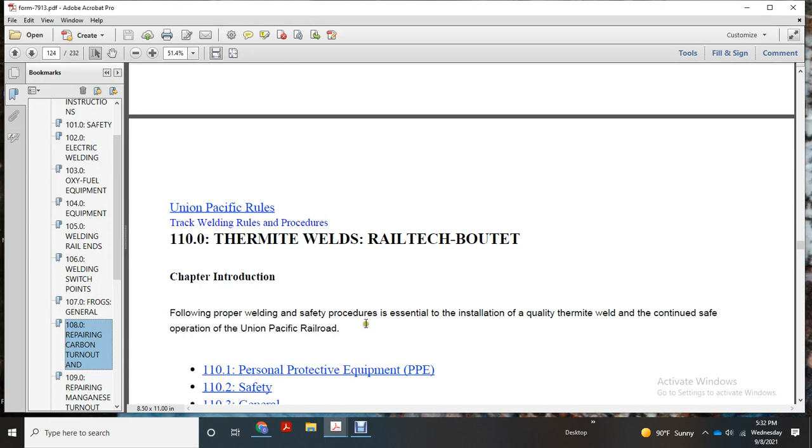Union Pacific Railway Thermite Weld Rail Tech guide, covering the proper welding specifications essential for installation of quality thermite welds and continued safe operation.

Topics include Personal Protective Equipment, general safety, replacement rail, weather restrictions, identifying rail type and alloy standards, determining weld location, compromise welds, compromise transition rail, speed restrictions, alloy rail elimination, bolt holes, reference marks, and removing defects via torch cutting the rail.

Pulling and clearing the rail end gap to the standard one-inch wide gap for the weld, using the alignment slot system to create the crown, with standard wide gap weld realignment and straightening the compromise mold. This includes base plate packing, positioning the flag base, and the preheating procedure with oxy-fuel equipment.

Starting and monitoring the preheat process, the rail tech uses propane and compressed air in the rail preheater, followed by crucible ignition and pouring.

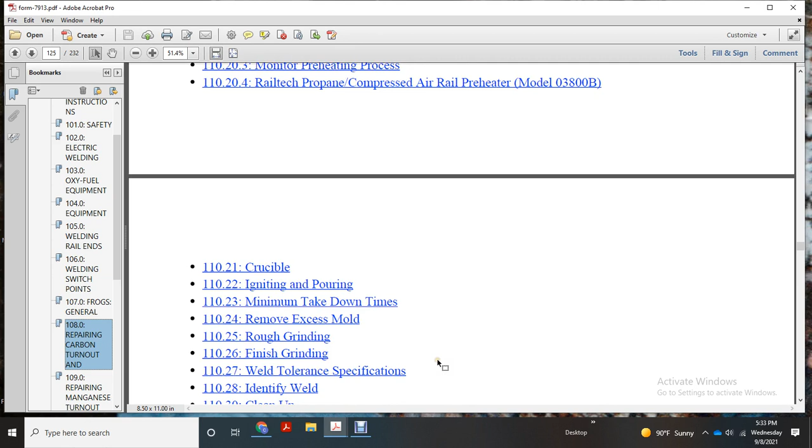Minimum takedown times, removing excess mold material, rough grinding, finishing grinding, welding tolerance specifications, identifying the weld, and cleaning up the thermite weld. Quality audit of the thermite head, washing, filling the weld, repair preparation, recording in the welder's log booklet, dye penetration testing, torch height, molds, clamps, and preheating.

Oxy-fuel torch preheating, forced air propane, torch takedown times, protecting the weld from cooling too quickly, grinding, and the required cleanup of molds and equipment.

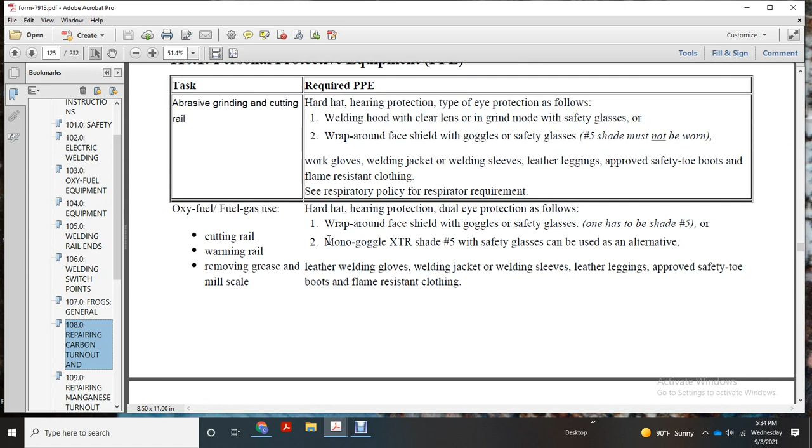Safety note: the presence of moisture in the thermite portion or in the crucible can lead to a rapid buildup and uncontrolled release of steam during the thermite reaction, which may further cause the ejection of molten metal from the crucible.

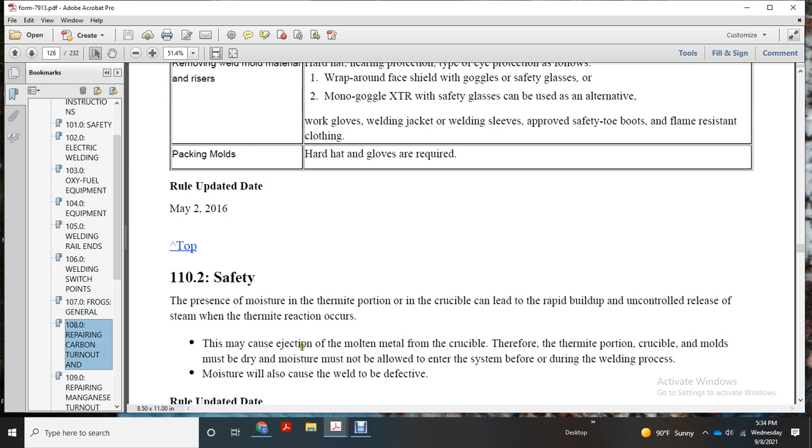Therefore, the thermite portion, crucible and mold must be kept dry, with moisture not allowed to enter the system before or during the welding process. Moisture will also cause the weld to be defective.

All thermite welds have a reference mark indicating the original amount of rail to be trimmed at the mark.

Do not use a wet crucible mold with the thermite oxide charge to make a weld if moisture has entered the crucible mold. If moisture is suspected to be present, discard the damaged item. Before discarding charges or igniters, contact the local Manager Environmental Field Operations for instructions on proper disposal.

It is critical to the success of the weld that there be no shock or vibration to the rail during the solidification process of the molten steel. The recommended shelf life of the weld kits is 3 years.

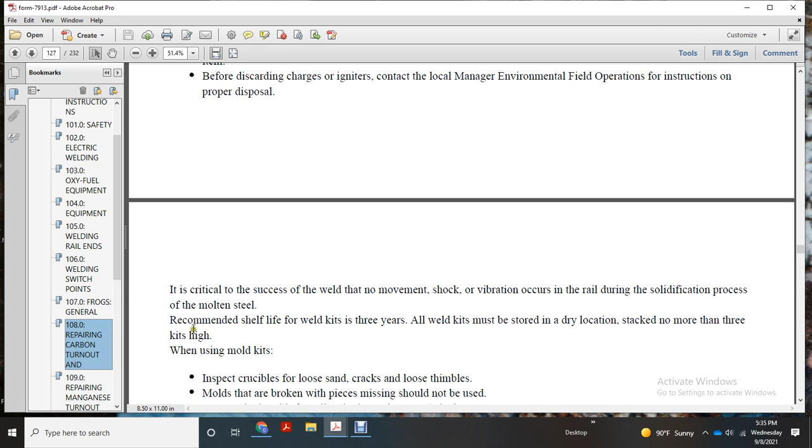Weld kits must be stored in a dry location, stacked no more than 3 kits high. When using the mold kit, inspect the crucible for loose sand and cracked or loose thimbles. Molds that are broken with pieces missing should not be used.

Use a standard mold when the rail end mismatch is up to 1/8 inch. Use the new-to-worn weld rail end mismatch mold for mismatches between 1/8 inch and 1/4 inch.

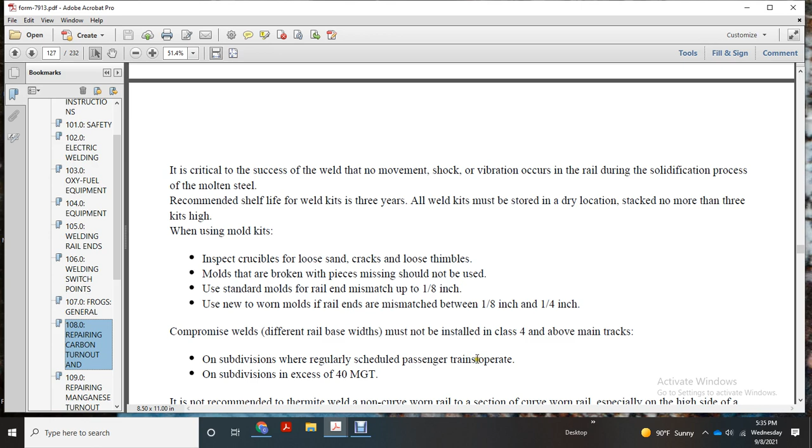Compromise welds for different rail base widths may not be installed on Class 4 or above main track on subdivisions with regularly scheduled passenger trains, or on subdivisions in excess of 40 million gross tons.

Thermite welding is not recommended on non-curved sections of worn rail, especially on the high side. Over the curve, the maximum difference in curve worn rail head width should not exceed 1/8 inch. Gauge side rail head curve measurements should be taken on the top of the rail head, except for mismatches handled by tapered grinding for a smooth transition.

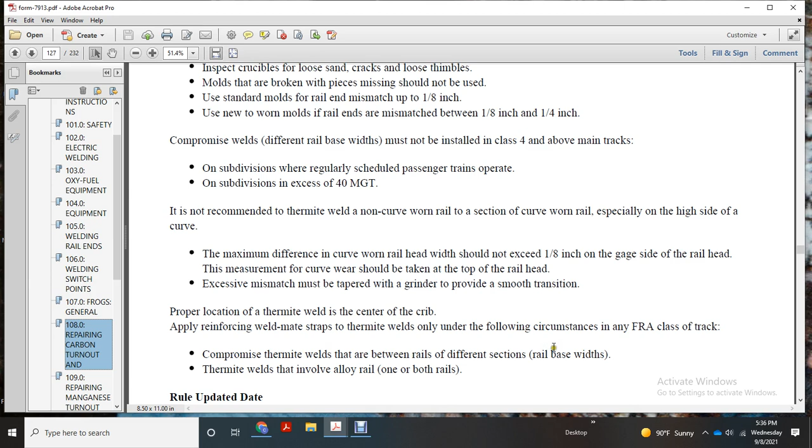Proper location of the thermite weld is at the center of the crib, using weld mate straps with the thermite weld only under specific circumstances. For any FRA class track, compromise thermite welding is used in the area between different rail base sections, where the thermite weld may involve one or both rails.

All replacement rails must have ultrasonic testing performed in accordance with the engineering track maintenance field handbook. Replacement rails for welding must not be less than 15 feet in length, and the vertical difference must not exceed 1/4 inch.

Use a compromising transition rail with a 6-inch base when rail end mismatches exceed 1/4 inch on main track and sidings. Torch-cut rail ends must have at least 2 inches removed using a rail saw, with the rail end ground down. Any mismatched ground portion must be cut out and a replacement rail installed on the main track.

Prior to thermite welding, rail ends must be squared or get proper crown.

Weather restrictions: observe air temperature and weather conditions. Do not make thermite welds on alloy rail when rail temperature is below 32 degrees. Do not make any other welds where rail temperature falls below 5 degrees.

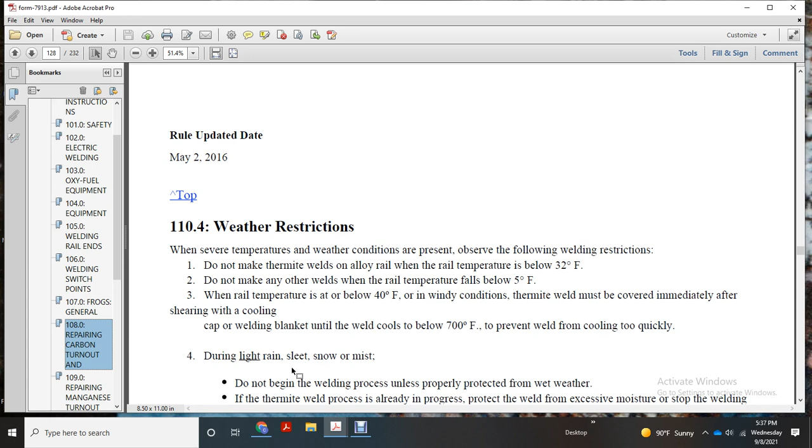When rail temperature is below 40 degrees Fahrenheit and wind conditions are present, the thermite weld must be covered immediately with a cooling end cap or welding blanket until the weld cools below 700 degrees, to prevent the weld from cooling too quickly during light rain, sleet, snow, or mist.

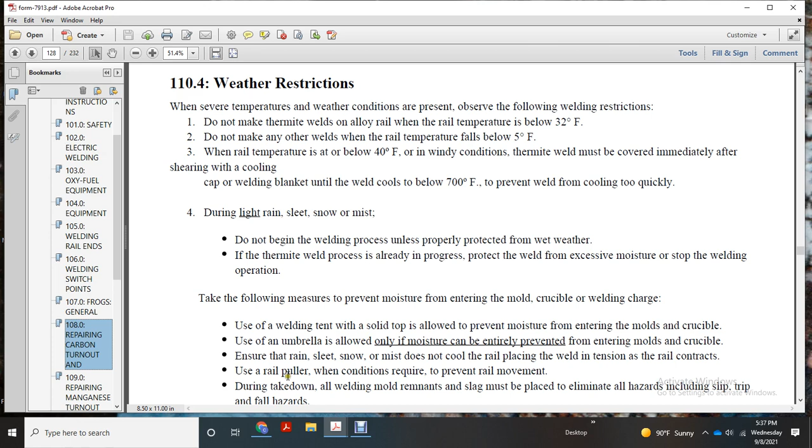During takedown, all welding mold remnants and slag must be placed and eliminated properly to avoid slip, trip, and fall hazards.

Before applying molds, use a rail thermometer or pyrometer to check the rail temperature. If the rail temperature is below 30 degrees Fahrenheit, warm the rails as follows.

Heat 30 to 36 inches at the end of each rail, bringing the rail temperature between 90 and 110 degrees Fahrenheit. If supplemental heat is added, remove any surface condensation.

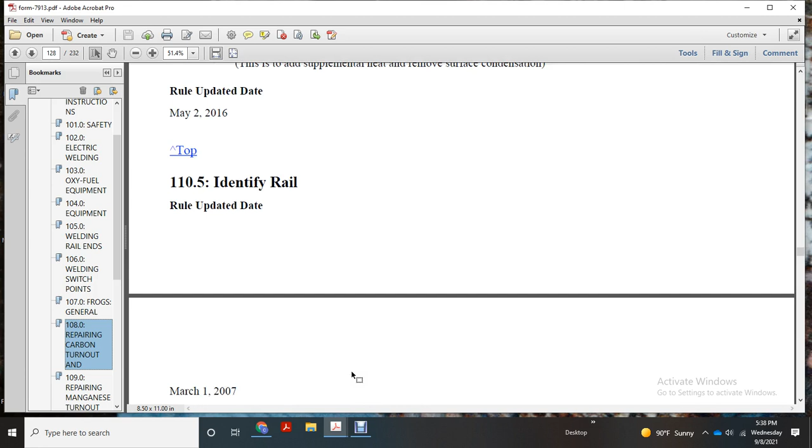Identify the rail type and alloy. Standard rail type must be confirmed, as different rail chemistry determines the specific maintenance and welding requirements.

Determining weld location: do not weld on top of a tie, but ensure that two good ties immediately under each side of the weld provide proper support, as shown in figure 110A.

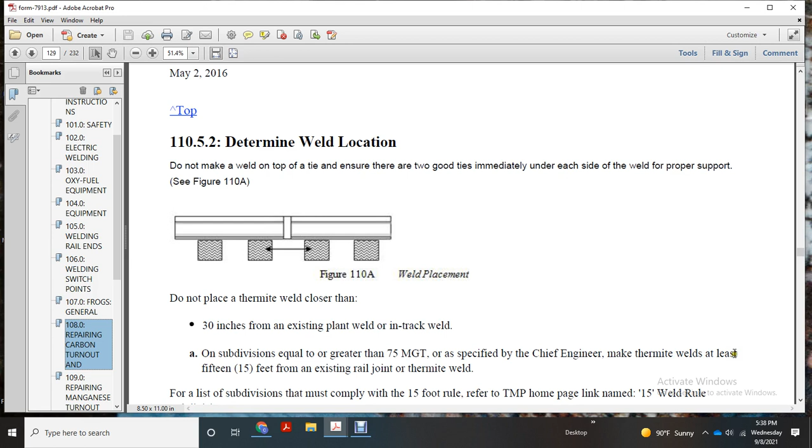Make welds at least 30 inches from an existing weld joint on any subdivision of less than 75 million gross tons not specified by the chief engineer.

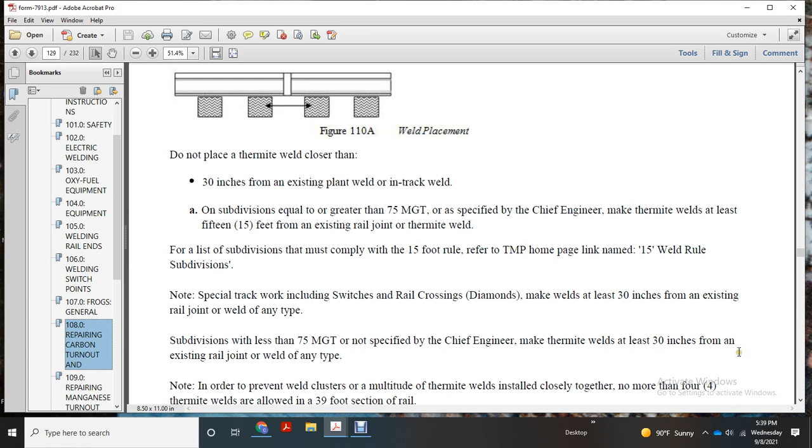Make thermite welds at least 30 inches from an existing rail joint or weld of any type, in order to prevent welding clusters or multiple thermite welds installed too closely together. No more than 4 thermite welds are allowed in a 39-foot section of rail.

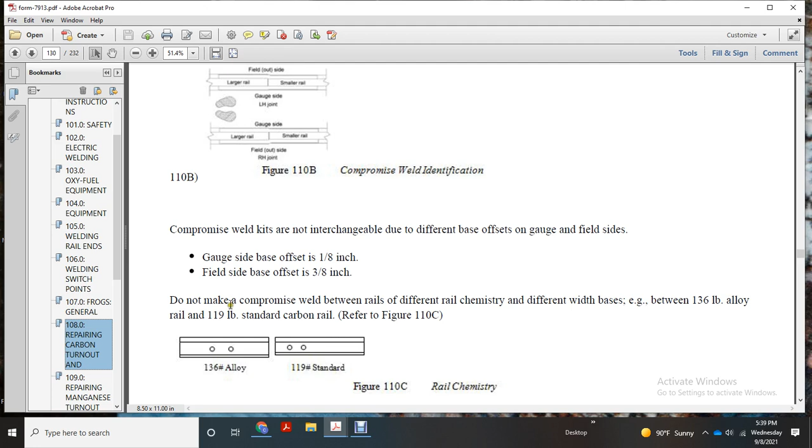If rails with different base widths and different chemistry must be joined, weld standard carbon rail the same way, with a section of alloy rail joined to alloy rail. The rail cut-in must not be less than 15 feet.

Make compromise weld butts between rails with the same chemistry. Compromise welds on opposite rails should be made within the same crib.

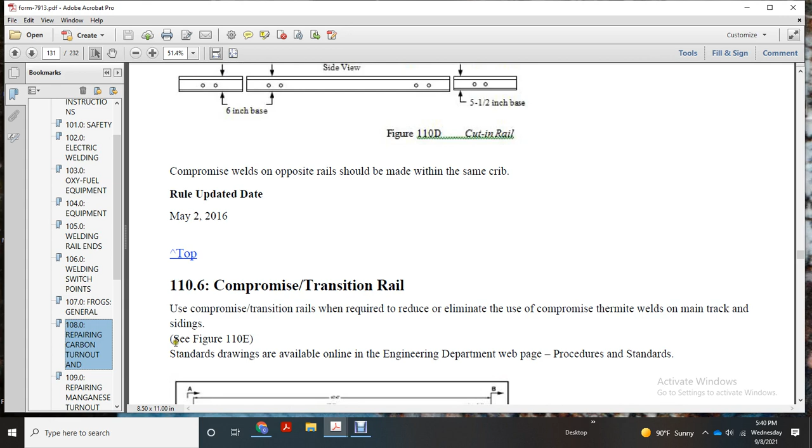Compromise and transition rail: use the compromise transition rail when required to reduce or eliminate compromise thermite welds between main track and siding, as shown in figure 110E. Standard drawings are available on the engineering department web page, procedures, and standards.

Speed restriction for alloy rail at all thermite welds involving alloy rail restrictions: maximum 30 miles per hour for a minimum of 24 hours after installation. Do not remove the speed restriction until all thermite welds in class 3 track and above are inspected and protected with weld mate straps.

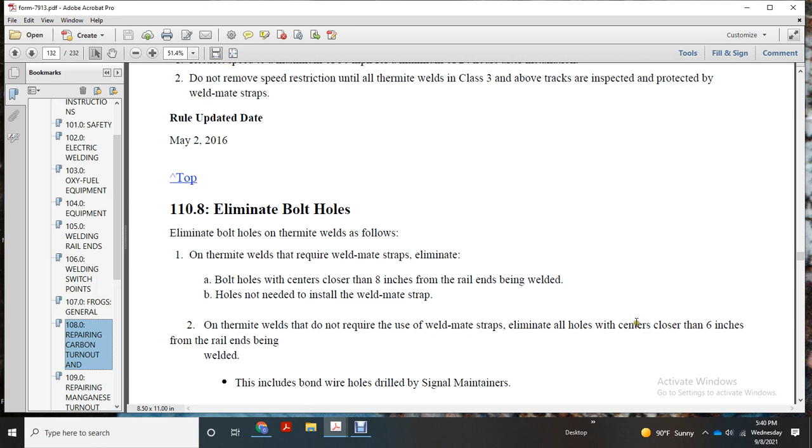Eliminate bolt holes at thermite welds as well. Thermite welds required with a weld mate strap must eliminate bolt holes with the center closer than 8 inches from the rail ends being welded. Holes not needed to install the weld mate strap. On thermite welds that do not require the use of a weld mate strap, eliminate all holes with the center closer than 6 inches from the rail ends being welded. This includes bolt bond wire holes drilled by signal maintainers.

Reference marker: apply reference marker before cutting rail. Remove joints as outlined in the engineering track maintenance field book handbook. See section 7, the track buckling prevention guidelines.

Remove defects: refer to the engineering track maintenance field book, rail defect remediation matrix, section 4, rail and joint replacement. Rail replacement is required with more than one defect, with any kind of defect detected within the same 39-foot length of rail in the same test, except for the bolt hole crack defect identified by rail detector cars.

Find the defect within the weld and do the following in the plant. For an in-track weld, cut out the defect: remove a 1 1/2 inch section of rail, 3/4 inch in each direction from the center of the weld.

For a thermite weld, cut out the defect: remove a 2 3/4 inch section of rail, at least 1 3/8 of an inch in each direction from the center of the weld.

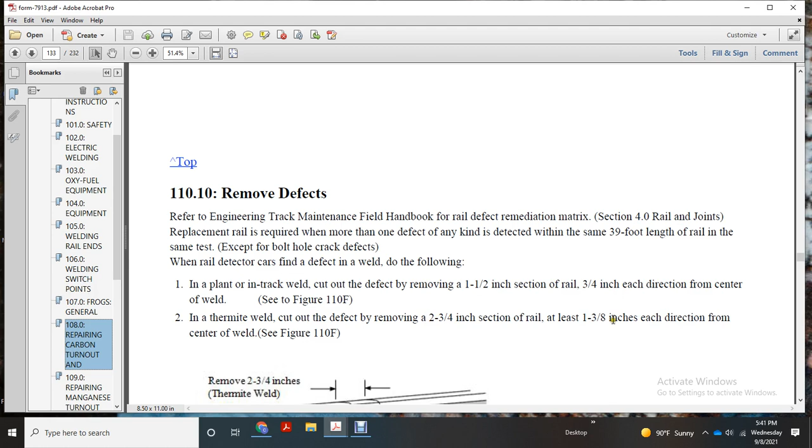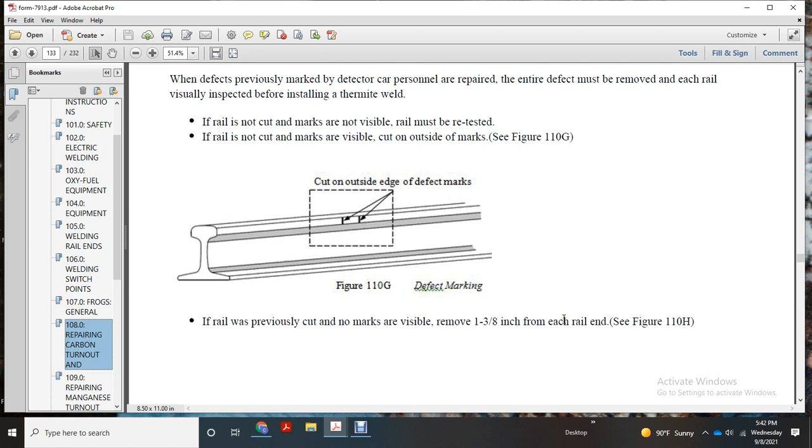When defects are previously marked by the detector, personnel repairing them must remove the entire defect, with each end of the rail visually inspected before installing the thermite weld. If the rail is not cut and the mark is not visible, the rail must be retested. If the rail is not cut and marks are visible, cut on the outside of the marks, showing a cut on the outside edge of the defect. If the rail was previously cut and no marks are visible, remove 1 3/8 inch from each rail end. Make one cut 1 3/8 inch from each end, and make additional cuts as needed.

Torch cut rail: any time the rail is cut with a torch, do the following. Use the rail saw to trim the torch-cut rail end square as soon as possible after the cut is made. After the torch cut is made, eliminate the growth of deep thermal heat cracks; any indication of the torch must be removed. If the rail saw is not available to square the cut, do not use the torch cut as is.

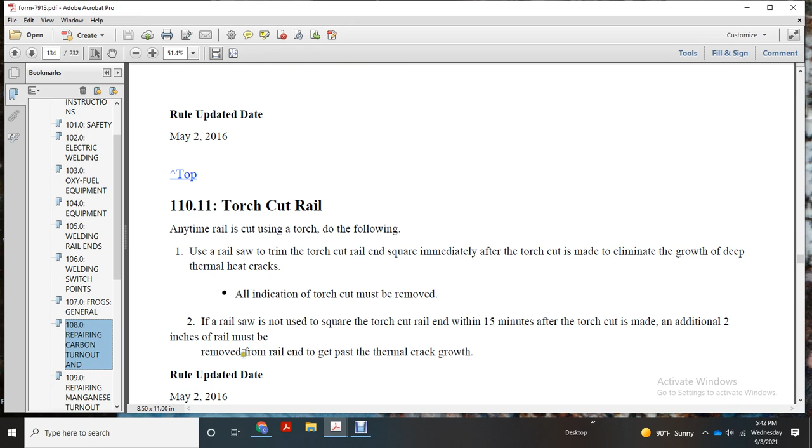Square the torch-cut rail end within 15 minutes after the torch cut is made. An additional 2 inches of rail must be removed from the rail end to get past the thermal crack growth.

Rail puller: refer to chapter 104.1.3, hydraulic rail pullers, for maintenance use requirements. When using the rail puller while installing thermite welds, follow these procedures.

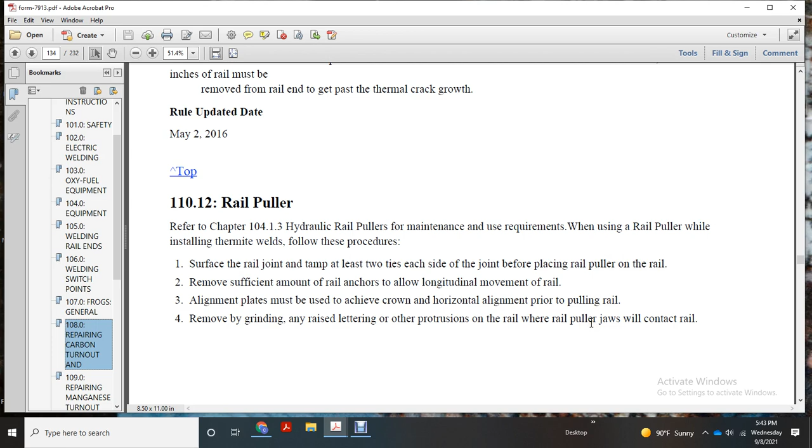Remove by grinding any raised lettering or other protrusions on the rail where the rail puller jaws will contact the rail. Remove dirt and grease from the area using a wire brush or torch, and once clean, inspect the rail puller jaws for any condition that can reduce gripping.

Operate the rail puller to obtain the correct gap. Never remove additional rail anchors while the rail puller is under pressure. If the desired pull cannot be achieved, release the expander, remove additional anchors, and repeat the process.

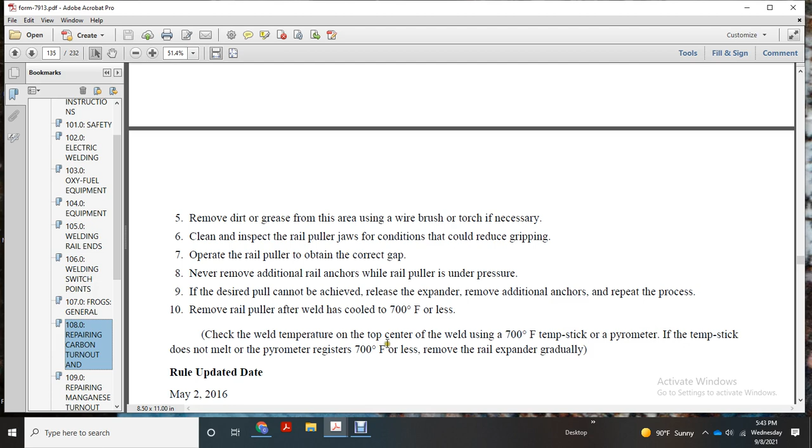Remove the rail puller after the weld has cooled to 700 degrees Fahrenheit or less. Check the welding temperature at the top of the weld using a 700 degree Fahrenheit temp stick or pyrometer. If the temp stick does not melt and the pyrometer registers 700 degrees Fahrenheit or less, remove all rail expanders gradually.

Clean rail ends: remove dirt and other material from the area of the thermite weld. Use the oxy-fuel torch to remove mill scale 3/4 inch from the end of the rail around the entire periphery, and remove grease 4 inches from the end of the rail.

Use a wire brush to remove dirt and other material 4 inches from the end of each rail. Visually inspect the rail ends for defects.

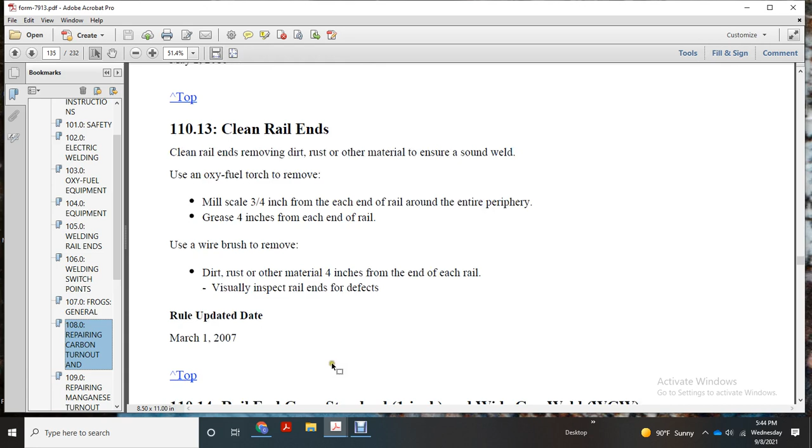Rail end gap: standard is a 1 inch wide gap weld. The required gap must be achieved within 1/16 inch before the thermite weld. Improper gap width results in improper preheating.

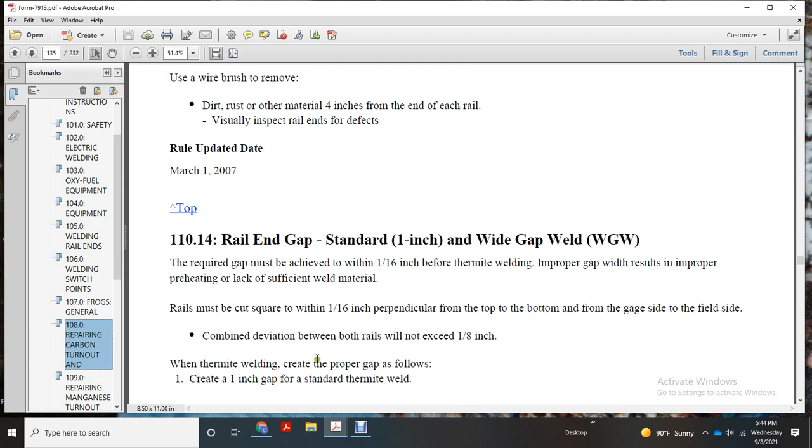Create a proper gap filled with a 1 inch gap for a standard thermite weld, or a 2 3/4 inch gap for a wide gap weld.

Alignment system: use the rail alignment plate as required with the installed thermite weld, with the exception that alignment wedges may only be used where rail alignment plates fail to work properly, such as at switches. Note: steel wedges must be kept in safe condition.

Metal flow is desired to eliminate cracks and chipping. After dressing, the weld is applied with an improved protective covering, creating a crown for the standard and wide gap weld.

To create proper crown, use rail alignment plates as follows: on wooden ties, move the tie plate to accommodate the rail alignment plates, and adz ties for proper fit with alignment plates if necessary. On concrete ties, remove the pads if necessary to accommodate rail alignment plates. Rail fasteners may need to be removed from 2 or 3 ties in each direction of the joint.

Insert rail alignment plates and adjust to achieve the required crown, with proper crown established at the end of the rail, so each rail joint contacts the underside of the straight edge.

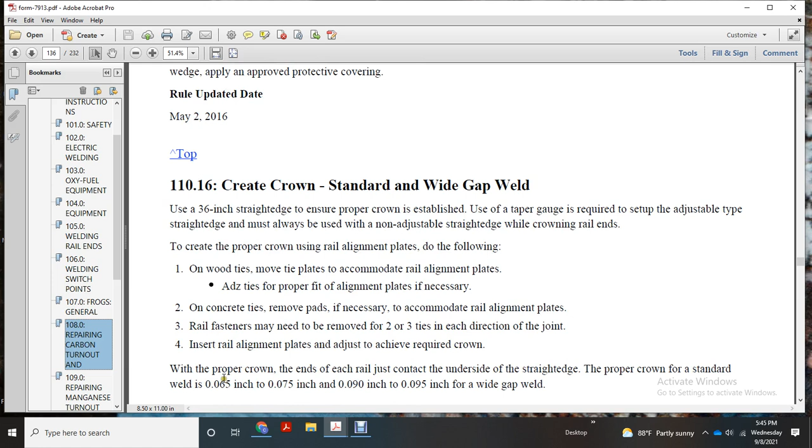Proper crown over the standard weld is 65 thousandths of an inch to 75 thousandths of an inch, or 90 thousandths of an inch to 95 thousandths of an inch for a wide gap weld.

On rail joints where one rail is excessively curved or worn, align with the rail on the field side at the head and base. This creates a compromised joint where rails have a different base width.

Use an alignment plate to achieve proper crown, aligning the rail's base on the gauge side with a 1/8 inch offset, and the base on the field side with a 3/8 inch offset. Align the rails so the gauge side of the head is perfectly aligned.

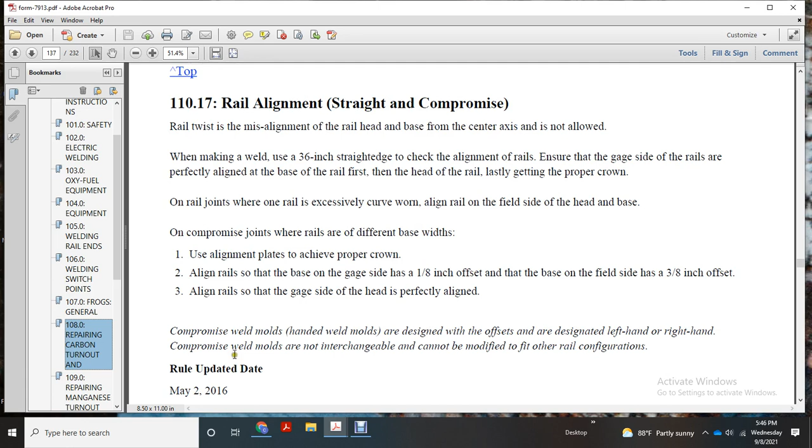Compromise weld molds are handed weld molds. Handed weld molds are designed with the offset of left hand or right hand. Compromised weld molds are not interchangeable and cannot be modified to fit other rail configurations.

Mold and base plate packing: mold and base plate placement is marked on both sides of the rail base for each rail, 2.5 inches on each end of the rail.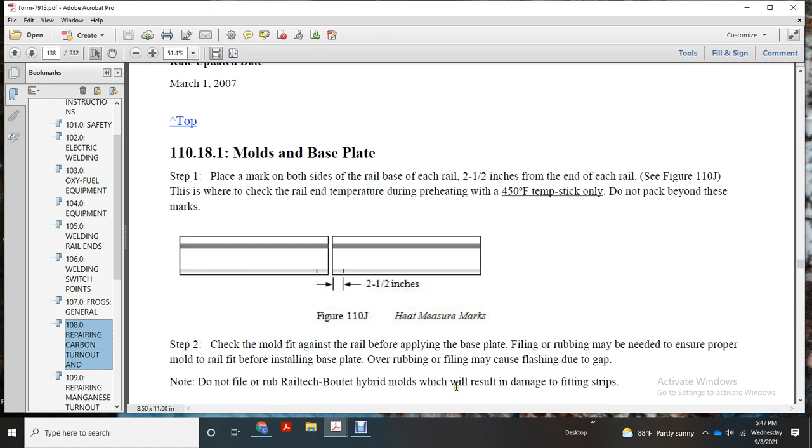Step 3: clean the base plate. Allow the base brick to fit freely. Maintain the base plate in good condition so that it aligns properly at the right angle with the rail.

If the rail base has a mismatch over 1/8 inch, a 1/4 inch stepped base brick must be used. Apply paste only to the edge of the base brick, avoiding leaving excess paste that could be carried into the weld with the molten metal.

Ensure the recess in the base brick is at the exact center of the rail gap. The base plate clamping screws should be snug but not over tightened.

After installation of the base plate, recheck the alignment and crown. Ensure the molds are perfectly centered on the base plate rail gap and fit up against the side of the rails with no gaps visible. Place the molds in the steel jacket, then set the molds onto the rail ends.

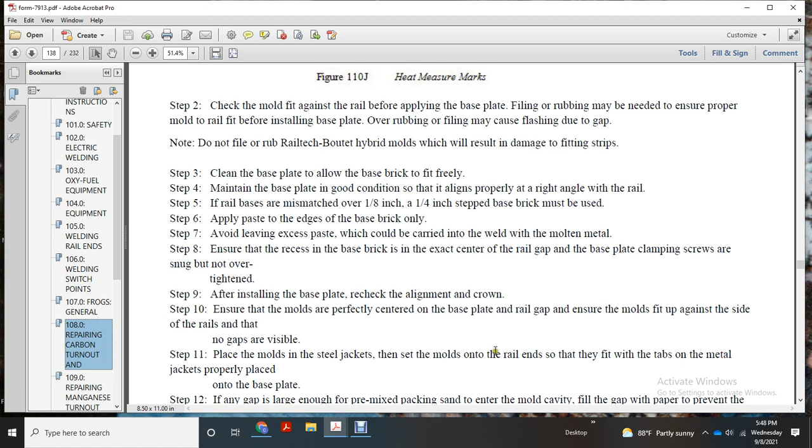Then fit the tabs on the metal jackets properly placed onto the base plate. If any gap is large enough, the premixed packing sand may enter the mold cavity. Fill the gap with paper to prevent the packing sand from entering the cavity.

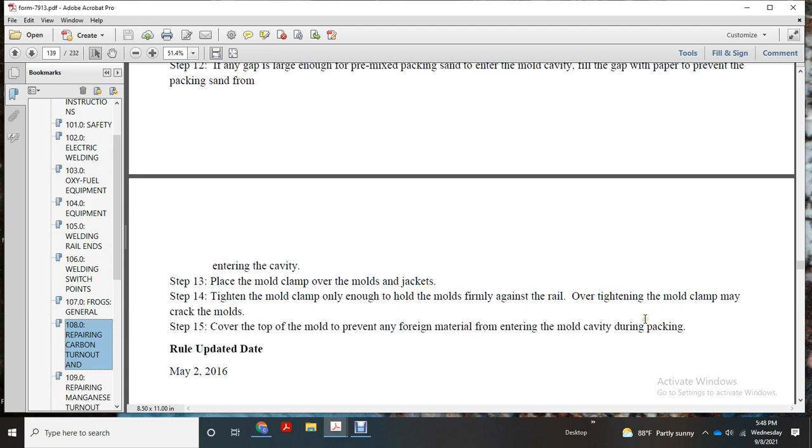Place the mold clamp over the molds and jackets. Tighten the mold clamp only enough to hold the molds firmly against the rail. Over-tightening the mold clamp may crack the molds. Cover the top of the mold to prevent any foreign material from entering the mold cavity during packing.

Packing: pack the mold solid with the premixed packing sand. Tightly seal all the seams and joints and maintain minimum thickness for the packing sand. Ensure that all the voids are filled.

Apply a second layer of packing sand, pressing firmly into place with your fingertips and palm. Do not pound against the premixed packing sand, as this pounding may jar the rail, causing it to misalign. Ensure the packing sand does not enter the mold cavity.

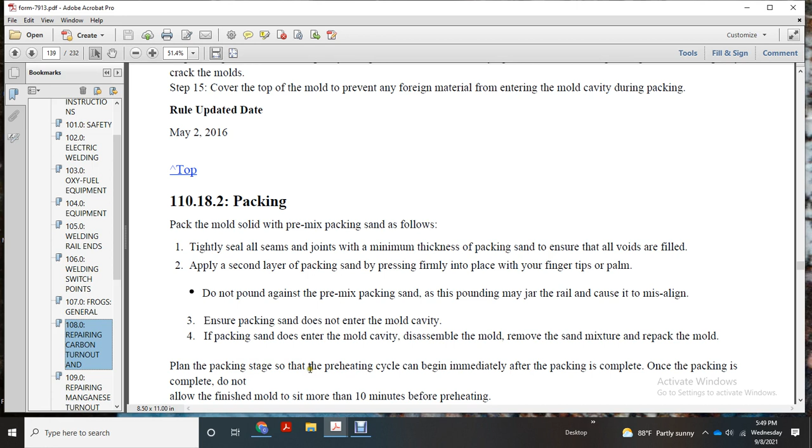If the packing sand does enter the mold cavity, disassemble the mold, remove the sand mixture, and repack the mold. Plan the packing stage so that the preheating cycle can begin, and begin preheating immediately after packaging is complete. Once packaging is complete, do not allow the finished mold to sit more than 10 minutes before preheating.

Position slag basins to allow the slag to flow out with the risers properly. On the turn track, position the slag basin inside of the rail on the gauge side; on the uncurved track, position the slag basin on the low side of the rail.

Preheating procedure: before preheating, ensure that you are familiar with and have been properly trained on the operation of the equipment. An approved torch stand must be used for preheating of thermite welds. The torch must be level, and torch height checked prior to preheating.

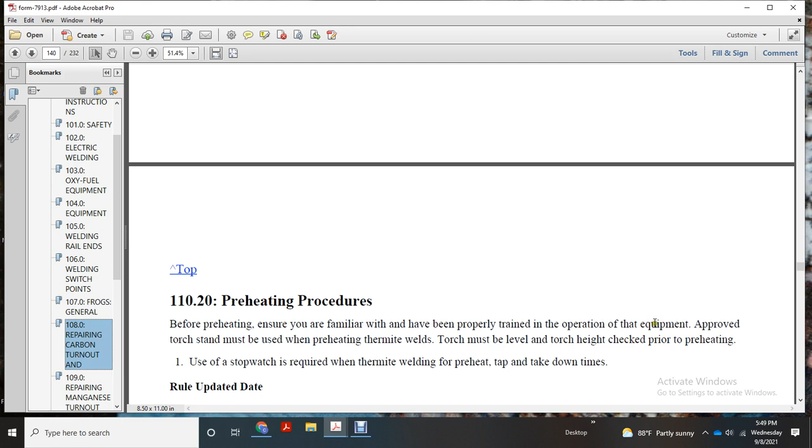Use a stopwatch, required with thermite welding, for preheat, tap and take down times. Use Oxy-Propane equipment: the Victor HD310C torch body or equivalent with the Railtech flat head or Victor TWN-5 rectangular torch tip. Pressure settings may vary with each.

The equipment should be adjusted accordingly with the torch mounted in-line; gauges must be verified. Pressure settings for every weld should be placed between the torch handle and the flashback arrestor. Extreme pressure variances of more than 15 psi between the cylinder regulator and in-line gauges indicate problems that must be corrected. Ensure sufficient oxygen and fuel gas in the cylinder to complete preheating.

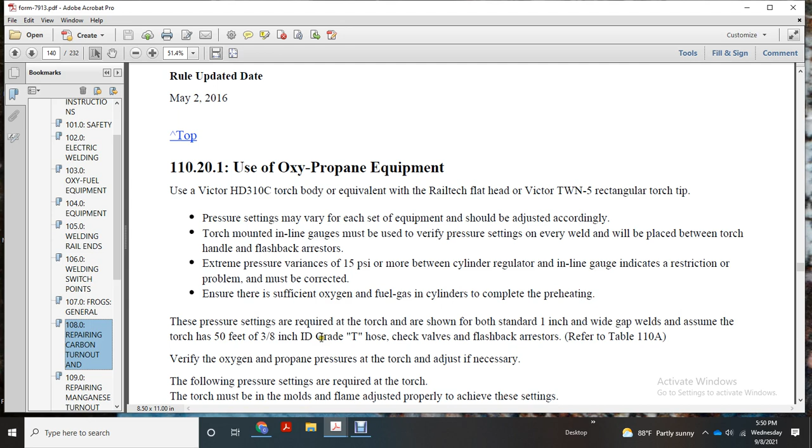Pressure setting required for the torch is shown for both the standard 1-inch and wide gap welds. Assume the torch hose is 50 feet with a 3/8 inch inside diameter, Grade T hose, check valve with a flashback arrestor, per table 110A.

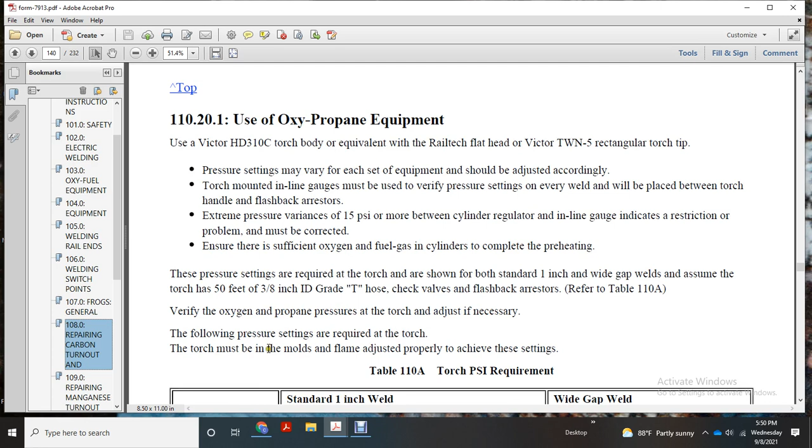Verify oxygen and propane pressure for the torch. Adjust as necessary following the required pressure settings. The torch must be mounted with the flame adjusted properly per the settings.

Torch PSI requirement: Propane 15 PSI for standard 1 inch weld, 15 PSI for wide gap weld. Oxygen 60 PSI for standard 1 inch weld, 60 PSI for wide gap weld. Do not use hose length greater than 100 feet.

Position the torch 1.5 inches above the top of the rail for the standard 1-inch weld. Operate at 2 3/8 inches above the top of the rail for a wide gap weld. Ignite the Oxy-Propane torch while it is mounted on the torch stand.

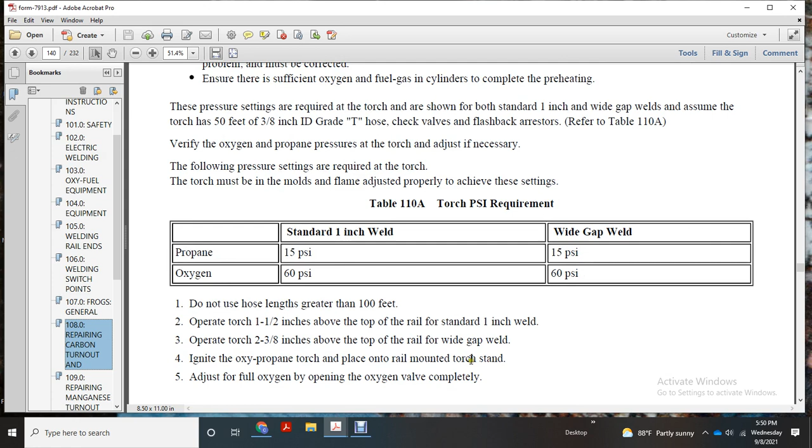Open the oxygen valve completely. Open the propane valve until a crackling sound occurs, then slowly close the propane valve until the crackling sound disappears.

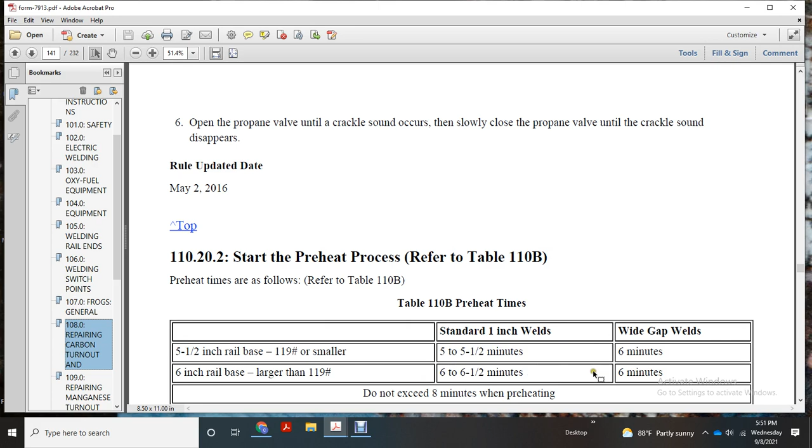Start of the preheat process, per table 110B: for rail base 5.5 inches (number 119 or smaller), standard inch weld 5 to 5.5 minutes, wide gap weld 6 minutes. For rail base 6 inches (larger than number 119), standard inch weld 6 to 6.5 minutes, wide gap weld 6 minutes. Do not exceed 8 minutes when preheating.

Monitoring the preheating process: wear the required protective equipment when monitoring. Ensure the torch is centered and straight with the rail. The igniting operator for the torch must observe the entire preheating of the rail end.

Ensure the rail ends do not melt. Ensure the rail ends and molds heat evenly to prevent improper fusion and internal cracking as a result of uneven cooling. Ensure the web glows bright red-orange with no sign of sweating or melting.

If the rail end is getting too hot, cool the flame by increasing the propane on the torch handle.

Ensure the rail head and base glow dull red with no black areas. After removing the torch, observe the true color of the rail ends.

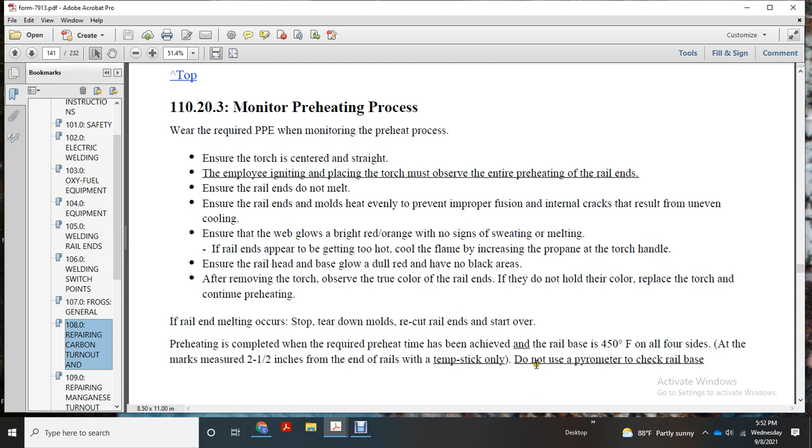If they do not hold the correct color, replace the torch and continue preheating. If rail end melting occurs, stop, tear down the molds, recut the rail ends, and start over. Preheating is complete when the required preheat time is achieved and the rail base reaches 450 degrees on all four sides, measured at 2.5 inches from the end of the rail with a temp stick only. Do not use the pyrometer to check rail base.

Railtech Propane Compressed Air Rail Preheater, Model 03800B. Setup for the operator of the propane compressed air rail preheater.

Aligning the inox heating nozzle, the flat piece of the nozzle should be no higher than the top of the inside of the mold where the diverter plug fits. The nozzle tip must be aligned straight up and down, perpendicular over the rail.

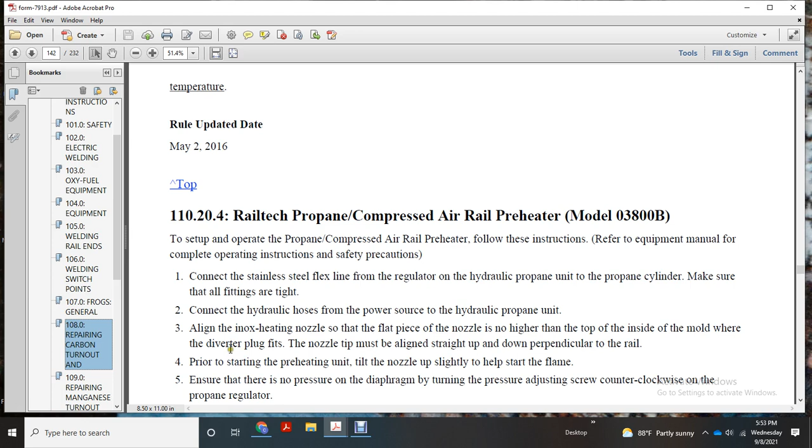For proper starting of the preheating, tilt the nozzle slightly to help start the flame. Ensure there is no pressure on the diaphragm. Turn the pressure adjusting screw counterclockwise on the propane regulator.

Open the hydraulic system to 10 gallons per minute at 2000 psi. Open the hydraulic control valve of the preheater to engage the blower unit. Open the valve of the propane cylinder completely. Open the air bypass valve located on the inox burner and adjust the air pressure for ease of lighting. Turn the pressure adjusting screw clockwise on the propane regulator to supply 8 to 10 psi.

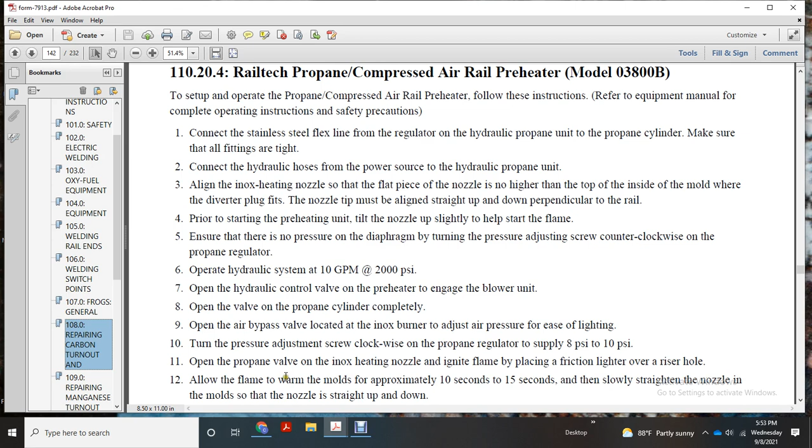Open the propane valve on the inox heating nozzle. Ignite the flame by placing a friction lighter over the riser. Hold the flame to warm the molds for approximately 10 to 15 seconds. Then slowly straighten the nozzle in the mold so it is straight up and down. The flame should be in the rail area and the riser.

If the flames are in the riser only, again, tilt the nozzle and then slowly straighten it as needed to adjust the flame, using the propane on and off valve located on the inox burner. After adjusting the nozzle, achieve the desired flame.

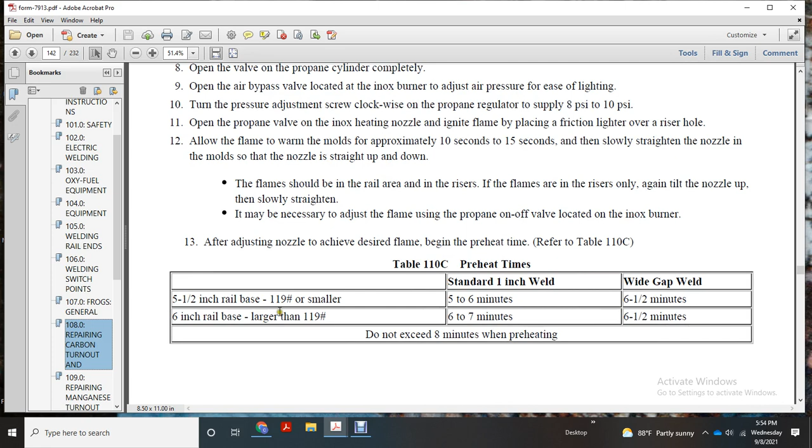Begin the preheat per Table 110C. For a 5.5-inch rail base, number 119 or smaller, preheat 5 to 6 minutes, or 6.5 minutes for wide gap. For a 6-inch rail base, larger than that, preheat 6 to 7 minutes, or 6.5 minutes for wide gap. Do not exceed 8 minutes when preheating.

Preheating is complete when the required preheat time has been achieved and the rail base reaches 450 degrees on all four sides, measured at 2.5 inches from the end of the rail base with a temp stick. Do not use the pyrometer to check the rail base temperature.

Crucible: while preheating the molds and rail ends, inspect the crucible for loose sand and cracks. Do not use the crucible if cracks are present or if it has a loose thimble. Do not place the crucible directly on any surface that might allow foreign material to stick to the bottom.

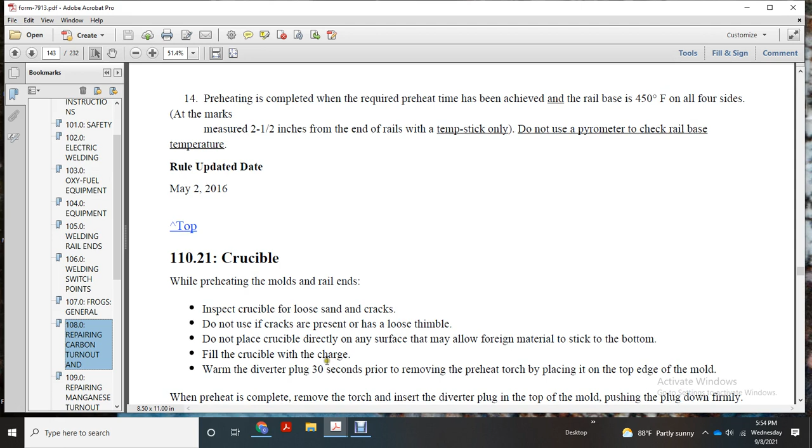Fill the crucible with the charge. Warm the diverter plug 30 seconds prior to removing the preheat torch. Place it on the top edge of the mold. When preheat is complete, remove the torch and insert the diverter plug in the top of the mold, pushing the plug down firmly.

Do not pound the plug into place. Note that the diverter plug always directs the molten steel, allowing it to flow into the mold properly and fill the mold evenly. Place the crucible onto the mold, centered over the diverter plug, using the two large riser holes as guides.

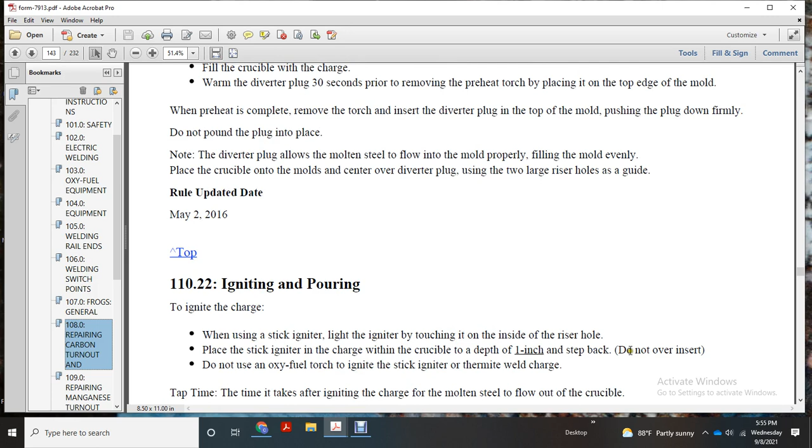Ignition and pouring: to ignite the charge, when using the stick igniter, light the igniter by touching the inside of the riser hole. Place the stick igniter into the charge within the crucible to a depth of 1 inch. Step back, do not over-insert. Do not use the oxy-fuel torch to ignite the stick igniter or thermite weld charge.

Tap time is the time it takes after igniting the charge for the molten steel to flow out of the crucible. Acceptable tap time is 15 to 35 seconds. If the tap time is less than 15 seconds or more than 35 seconds, the weld must be considered defective and removed from the track.

Hot metal or slag coming into contact with moisture can cause an explosion. When the thermite weld is pouring, protect yourself and others from coming into contact with hot molten steel, as high as 5,000 degrees. The bright light from the thermite reaction can harm your eyes, so protect them.

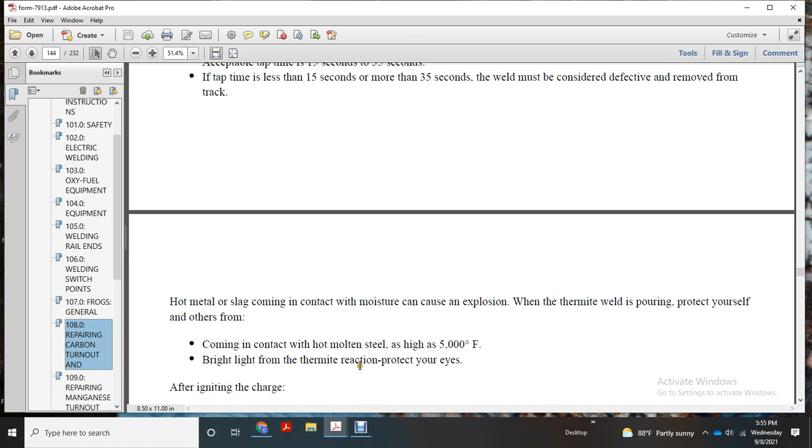After ignition of the charge, stand back 15 feet while the molten steel pours into the mold. If a leak develops in the mold, do not attempt to stop the leak.

Minimum takedown times: remove the crucible using the CJ fork, place it in a safe dry location. Remove the slag basin and place it in a safe dry location. Wait 20 minutes before emptying the slag basin and remove the mold clamp and jackets, then demold the weld material.

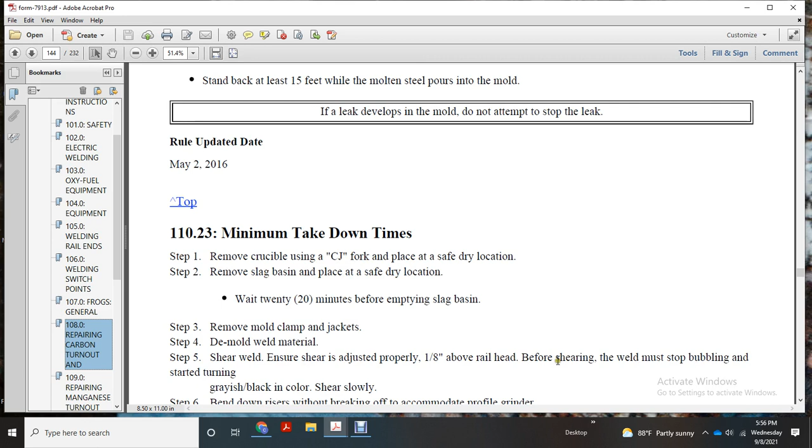Shear weld. Ensure the shear is adjusted properly 1/8 of an inch above the railhead. Before shearing, the weld must have stopped bubbling and started turning a grayish black color. Shear slowly, bending down risers without breaking off, accommodate with a profile grinder.

When the slag stops pouring into the slag basin, start the minimum takedown times as follows: remove the crucible in 5 minutes, remove the slag basin in 5 minutes, remove the clamp and jackets in 5 minutes for 1 inch.

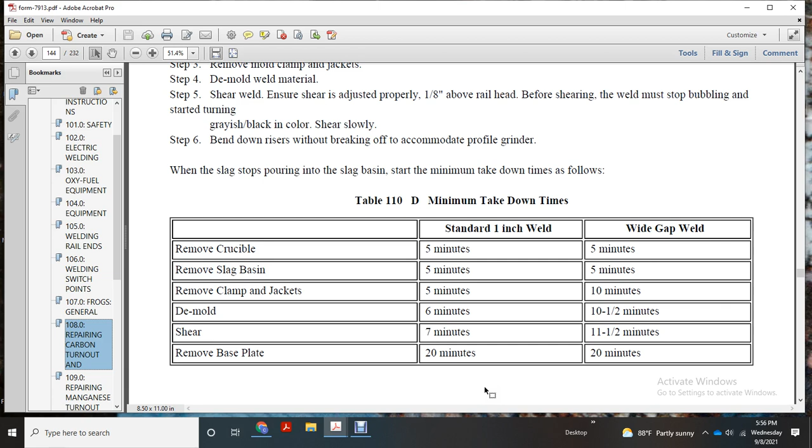Do not discard hot slag where someone could step on it or where it could start a grass fire. Do not discard hot slag on wet soil, snow, or throw it into water.

Rough grinding on the railhead portion of the thermite weld can be performed after shearing. Rough grinding of the running surface of the rail shall be performed with a surface grinder, completed when the excess weld material is reduced to approximately 30 thousandths of an inch.

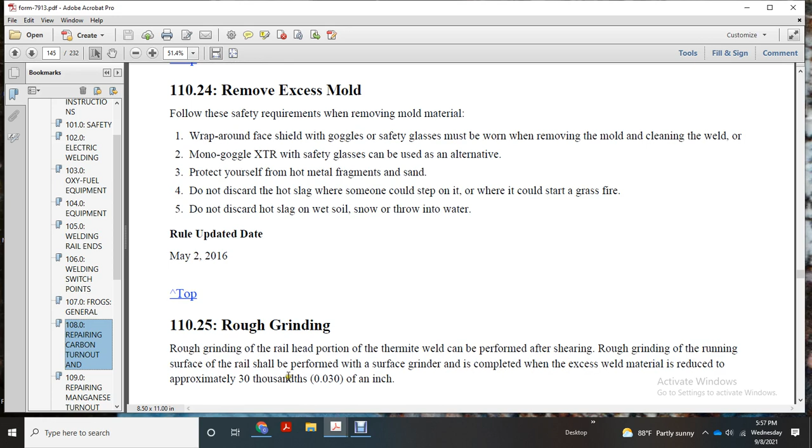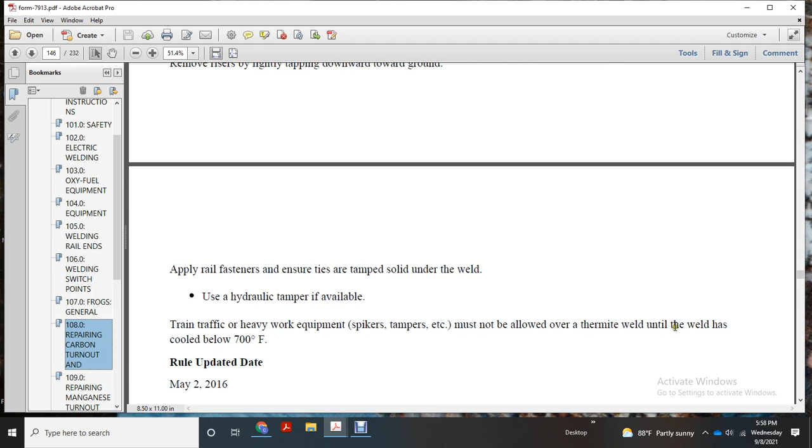Train traffic, heavy work equipment, spikers and tampers must not be allowed over the thermite weld until the weld has cooled below 700 degrees Fahrenheit.

The finishing grinding using an 8x1 straight stone grinder taper to remove the sharp edge of the teardrop under the railhead. Grind the risers flush with the weld collar. Do not grind into the collar. Don't grind into the parent metal.

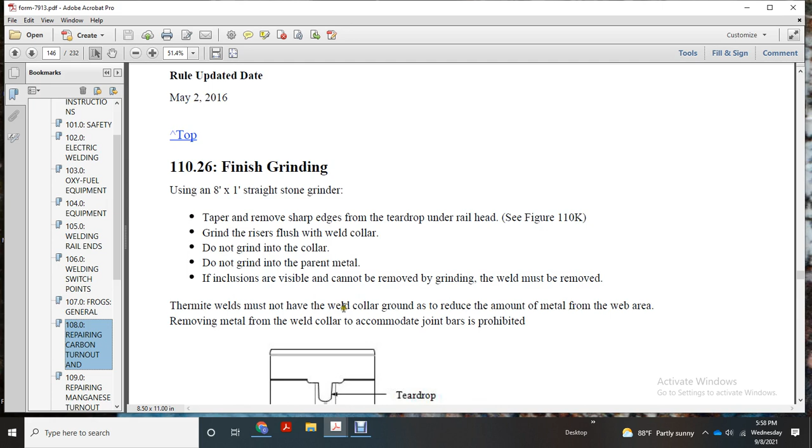Inclusions that are visible that cannot be removed by grinding must be removed. The thermite weld must not have the welded collar ground to reduce the amount of metal from the web area. Removing metal from the welded collar to accommodate joint bars is prohibited. Shape the teardrop of the collar on the underside of the railhead.

For vertical offset or gauge mismatch, grind the rail to achieve a gradual transition. Final surface grinding will be performed after the weld has cooled to below 700 degrees.

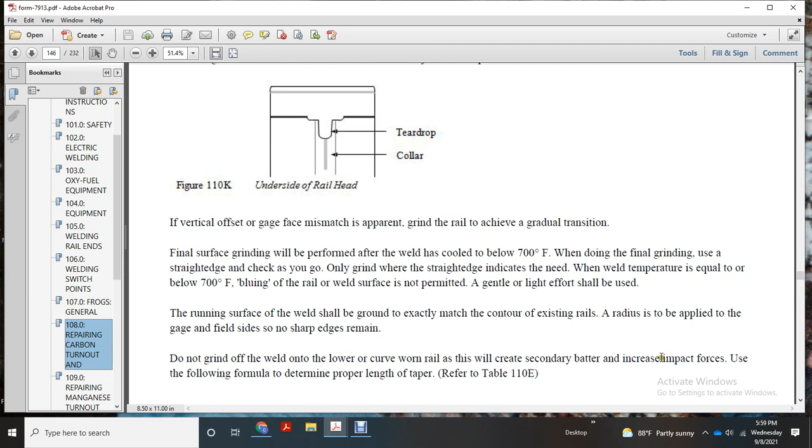Use the following formula to determine the proper length of the taper for table 110E: minimum ramp length in feet equals the offset in thousandths of an inch over 8,000ths of an inch.

30 thousandths of an inch: 4-inch taper length. 60 thousandths of an inch: 8-inch taper length. 90 thousandths of an inch: 12-inch taper length. 125 thousandths of an inch: 16-inch taper length.

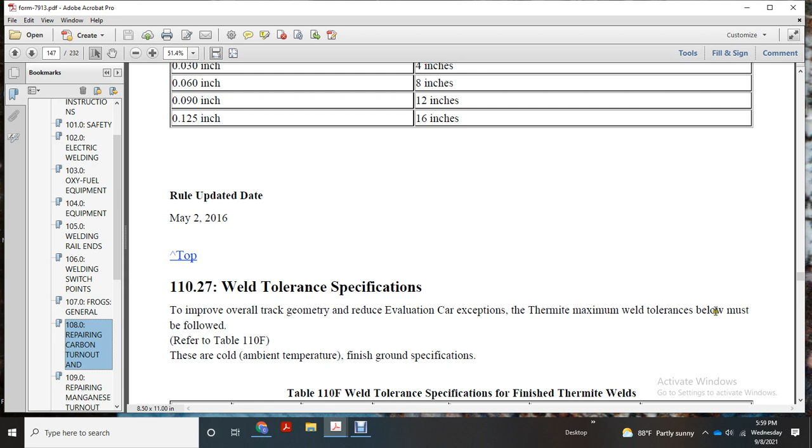Welded tolerance and specification improve the overall track geometry and reduce evaluation car exceptions. The thermite maximum welded tolerance below must be followed with reference to table 110F, after they reach cold ambient temperature, for the finish ground specification of the finished thermite weld.

Thermite vertical crown, vertical offset, horizontal kink, base offset, horizontal offset, base vertical offset. Maximum base vertical offset will not exceed 250, and the vertical crown with the thermite is 40 thousandths inch. Vertical offset 20 thousandths inch, horizontal offset 40 thousandths inch, horizontal kink 25 thousandths inch, base horizontal offset 60 thousandths inch, base vertical offset 250 thousandths inch.

Combined vertical crown offset with a 60 thousandths inch maximum, express tangential deviation 18 inches from the center of the weld. Combined horizontal kink offset with a 60 thousandths inch maximum, express tangential deviation 18 inches from the center of the weld. Measured on the convex side of the railhead. After the thermite weld has been installed use a straight edge to measure the crown vertical offset, horizontal offset,

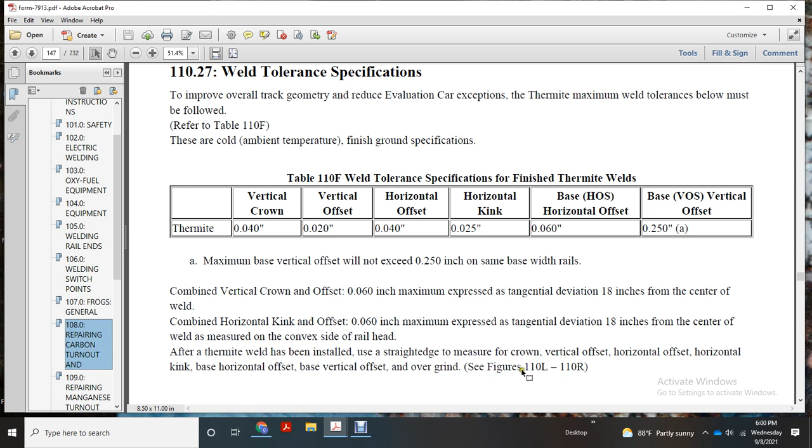Horizontal kink, base horizontal offset, base vertical offset, and the over grinding figures 110L to 110R.

Welds must not be over ground. Use straight edge periodically to check the process.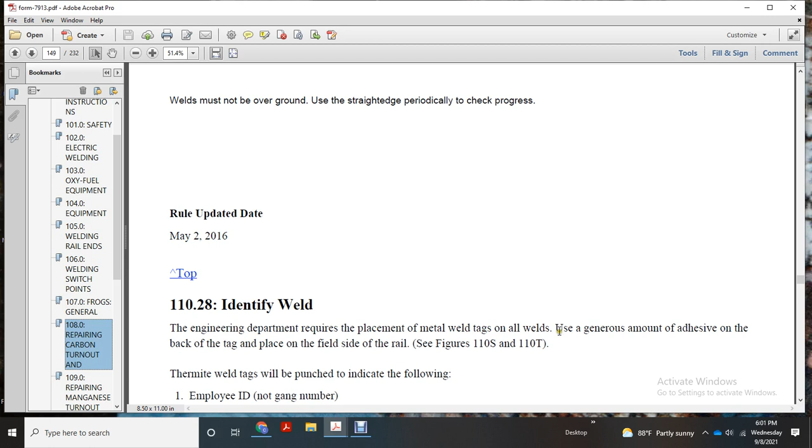Alright, identify the weld. Identify the weld. Engineering department required the placement of the metal welded tags on all welds. Generous amount of the adhesive on the back of the tag place on the field side of the rail. See figure

110S and 110T. The thermite weld tags will be punched indicating the following: employee ID, not the gang number. Month and year install, month and year weld kit manufactured, 1-inch gap weld gap, or weld gap weld.

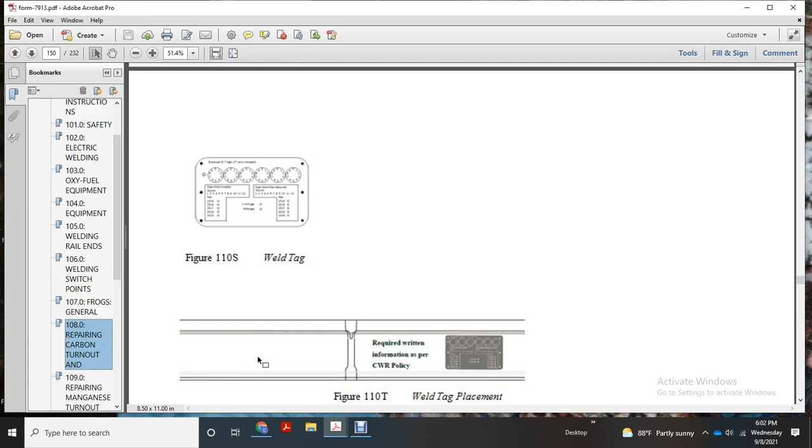Show the weld tag, and it's required written information. Continuous welded rail policy. Cleanup.

The cleanup will be performed before final grinding. Cleanup includes reapplying rail fasteners, reapplying the anchors, filling the cribs, removing any welded material waste, including slag, spent molds, riser, packaging from the worksite. Dispose of them properly. Do not leave welded waste exposed at the worksite.

Approved welding bucket can be used to remove the debris. Worksite store stock item 460-7115.

Thermite weld quality audit. Managers and employees use the written thermite weld quality audit form to assess the workmanship of the welding gang in the field. Welding audits to be submitted to the electronic weld quality auditing system in the TMP.

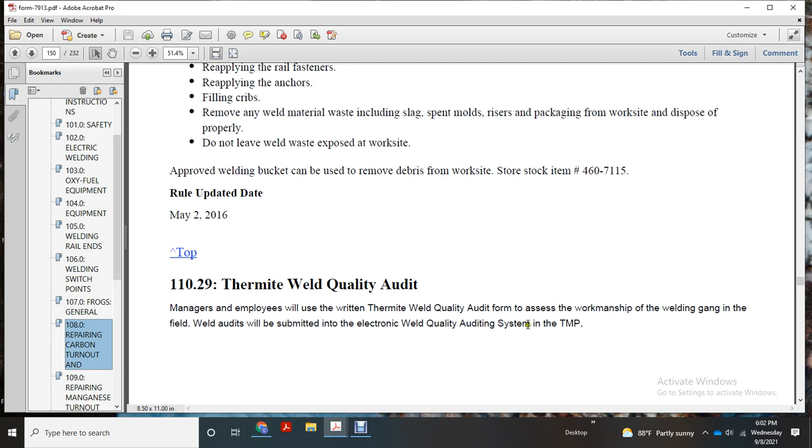Alright, thermite head wash weld. Only designated track welding employees who have the training and are qualified are allowed to install thermite head wash weld with all personal protective equipment. Must be aware of any thermite welding procedure when performing dye penetrant tests.

Wear wrap-around face shield with goggles and safety goggles, model XTR with safety glass can be used as an alternative. Railtech bucket kits available in number 115 and 132, 136 rail.

Rail preparation. Do not weld a non-alloy rail with a rail temperature below 5 degrees Fahrenheit. Warm rail, remove any traces of moisture around the entire peripheral rail.

Use Oxy Fuel torch and wire brush to clean the rail of any dirt, oil, grease, or other contaminants on the rail. Align with the tool, pre-crown rail with 0.045 inch with a 36 inch straight edge

Taper gauge before grinding into the 2-inch slot. Mark the rail with the depth of the grinding on both sides of the rail head.

Use the depth tool. Remove by grinding the entire defect in the rail head, leaving 1/4 inch of the rail head. The ground strip must be left even on both sides of the railhead.

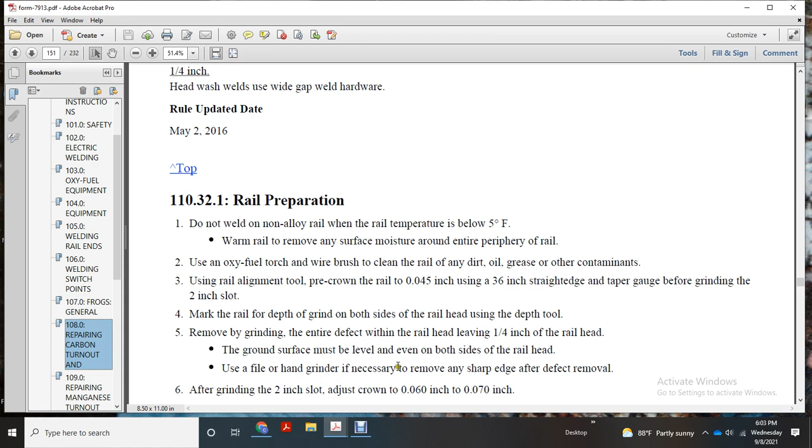Use file or hand grinder, if necessary, to remove any sharp edge from the defect removal. After grinding the 2-inch slot, adjust crown to 0.060 to 0.070 of an inch.

Welder's log booklet. All thermite welds installed must be recorded. Welder's log booklet with all required information, including placing the welding charge sticker in the specified area on the log page, and the sticker cannot be placed into the book.

The sticker information must be written down, and all completed welder log booklets must be kept in a safe location, made available by any manager whenever the representative requests the welder's log booklet, item number

PB24095, and dye penetrant test. Conduct the dye penetrant test with DF type defects; not required with SSC type defect.

Gloves must be worn during the entire process. Brush the surface of the rail with a wire brush to remove contaminants. Clean the surface of the rail free of dust and dirt with a piece of cloth. Spray clean over the surface.

Remove the oil and grease, wipe it off with a cloth, then apply dye penetrant.

Apply enough to cover the area to be tested. Allow 3 to 5 minutes of dye penetration in the cracks, then wipe the excess penetrant off the surface with a piece of cloth.

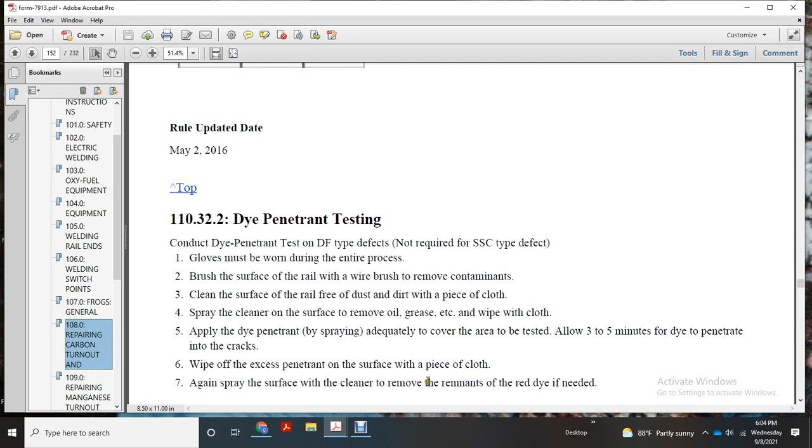Again, spray the surface with cleaner to remove remnants of the red dye if needed. Spray the developer evenly to give a thin layer that absorbs the penetrant from the cracks, making the red spot or line appear, giving a visible indication of the flaws.

Any crack is indicated by the red dye absorbed into the white developer. Remove the white developer before proceeding.

Torch height preset: Oxy-fuel head torch height is 4 1/8 of an inch. Preset inox burner torch height is 3 3/8 of an inch.

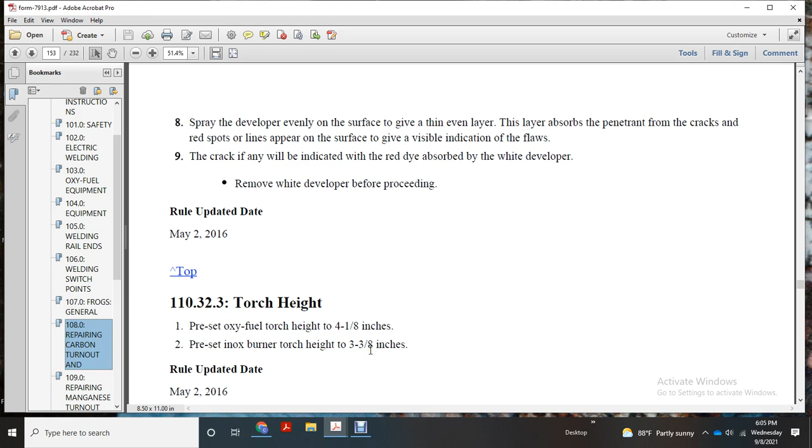Molds and clamps: place molds and clamp. Molds may need to be filled with rubber to ensure a tight fit with the rail. Care must be taken not to overfill, as this may cause flashing.

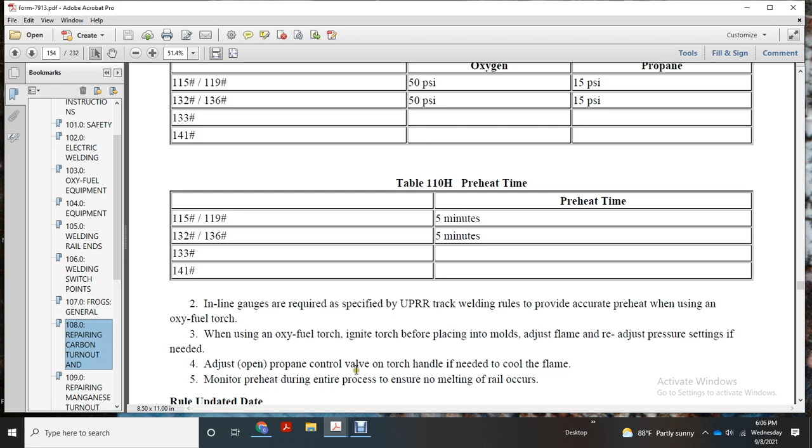Forced air propane torch: preheat the forced air propane torch. For rail sections 115 and 119, use 2 to 2.5 psi air and 8 to 12 psi propane; the same applies for 132, 136, 133, and 141, not mentioned.

The preheat time for 115, 119, 132, and 136 is 5 minutes. Tilt the torch head to the mold and ignite, allowing it to burn approximately 20 seconds before removing the torch.

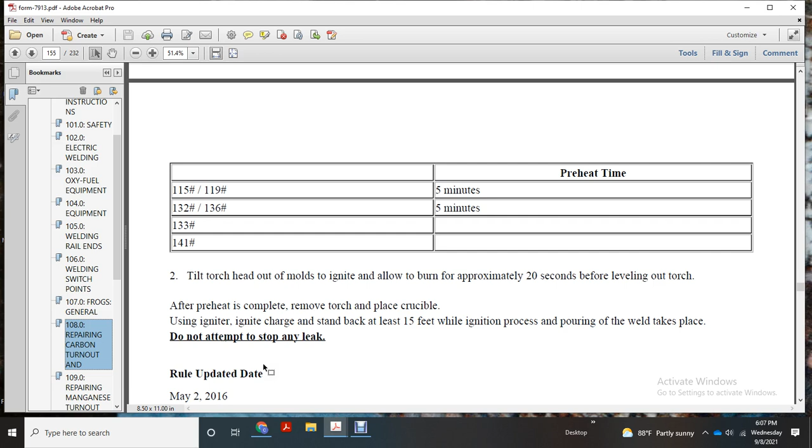After preheating is complete, remove the torch, place the crucible, ignite the igniter charge, and stand back at least 15 feet while the ignition process and pouring of the weld takes place.

Do not attempt to stop any leak. For takedown times, follow the minimum takedown time in table 110.

Remove crucible and slag pan at 5 minutes. Remove clamp and mold jackets at 8 minutes. Remove the top mold and riser mold at 9.5 to 10 minutes. Shear slowly at 10.5 to 11.25 minutes.

When demolding, proceed slowly and watch for leaks. Keep rail clamps loose when shearing.

Protect the weld from cooling. When rail temperature is below 40 degrees or in high wind conditions, apply a cooling cap immediately after shearing to reduce the cooling rate of the weld until the weld temperature is 700 degrees Fahrenheit or less.

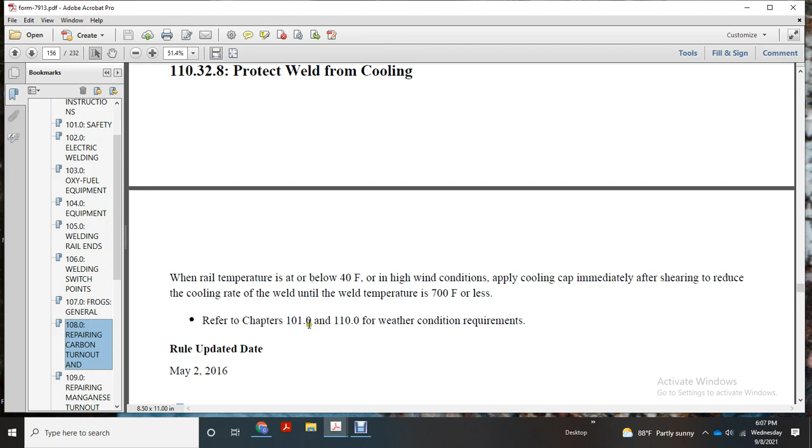Refer to chapters 101 and 110 for weather condition requirements. Rough grind the weld until material is reduced to about 30 thousandths of an inch in height.

Do not finish grinding blend while the weld temperature is above 700 degrees Fahrenheit, as this may result in a low weld. Do not grind into the parent rail, with the resulting dipping and batter, unless the parent rail's existing batter condition is present.

Requires tapering and a smooth transition. This may appear on some SSC type defects.

Empty the slag basin 20 minutes after the pour is completed. Remove the crown device 30 minutes after the pour is completed. Time begins at the last drop of slag flowing into the slag basin.

Finish grinding the weld to match the contour of the existing rail. Any indication of flashing under the railhead must be removed by grinding, as flash can contribute to defect development.

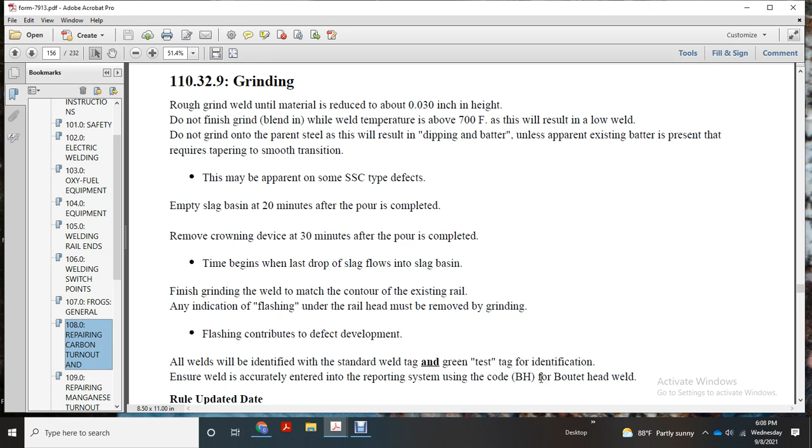All welds are identified with a standard welding tag and green test identification to ensure welds are accurately entered into the reporting system, using the code BH for Boutet head weld.

Cleanup is performed before final grinding. Cleanup includes reapplying rail fasteners, reapplying anchors, filling the cribs, and removing any weld material waste including slag, spent molds, risers, and packaging, with proper worksite disposal.

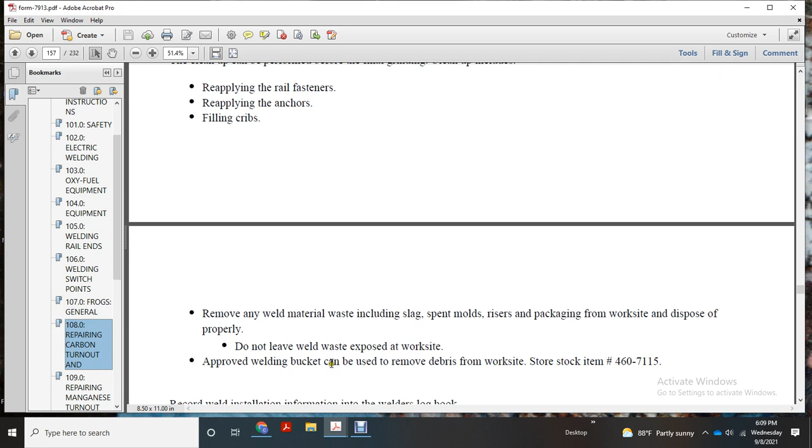Do not leave weld waste exposed. An approved welding bucket can be used to remove debris from the worksite; store stock item 460-7115.